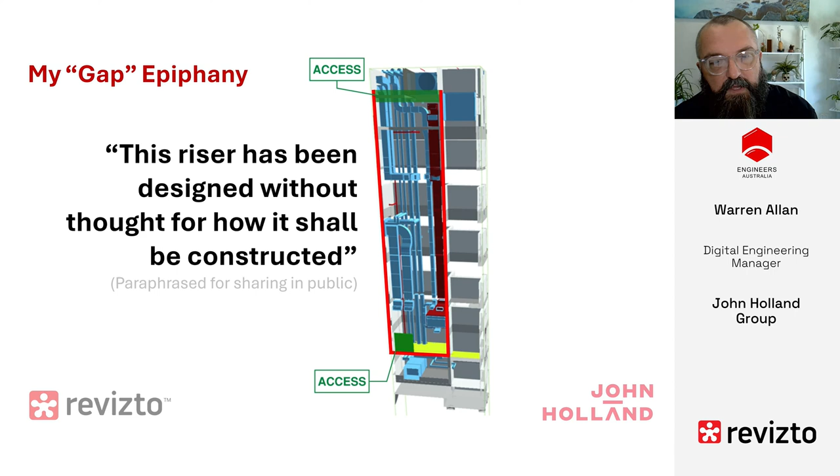So this is where I first became acutely aware of the gap between design and delivery teams. I'll paraphrase because we're not going to use our nasty words today. This riser has been designed without thought for how it shall be constructed. Basically what we had is a 30-metre vertical riser that could only be accessed from either ground floor or the open top of the riser above.

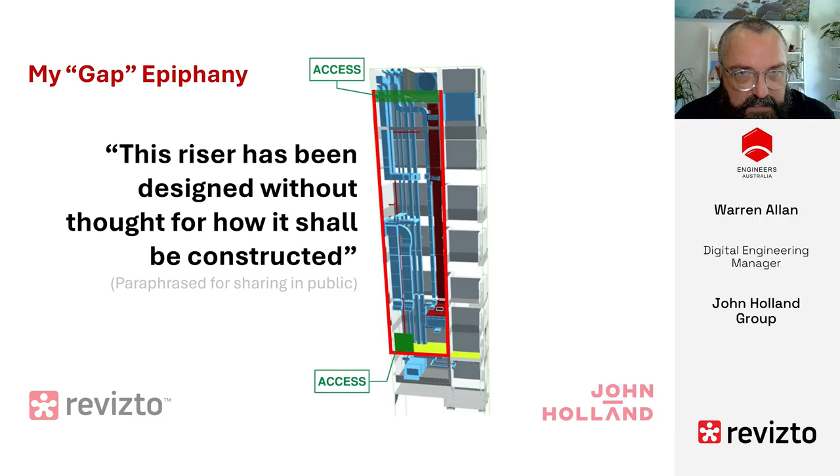So we're in this situation where we cannot get in there to install services, we cannot get in there to commission, to prepare this. It took me quite a while to convince people that this was actually going to be a delivery problem and a safety problem. What ended up happening was a prefabricated riser frame solution was implemented, which added time to program and added expense. But at the time of design, when we looked at it, no one had thought, how are we going to build this? Or they just assumed it was going to be a scissor lift or scaffolding or something along those lines. It just was not going to work.

So what I've learned over the last 20 odd years, and especially over the last 5 years moving into the digital space, is it's critical to ask the teams what they need and then listen to the response, actually listen, rather than just telling teams what they are getting. If you don't empower people to have what they need and have tools that they can actually have buy-in and use, then people won't use the platforms.

We need to start by building simple and robust workflows. We need workflows that don't rely on people just pushing buttons every day to make the systems work. We need to help teams build their individual user confidence. So if people aren't confident in what they're looking at, if they're not confident in the data they're extracting from these platforms, then they're not going to use them.

And support and empower your teams. Encourage your team to come and ask you questions, encourage them to say what is not working for them, what is causing them the most grief, and then see if there's a digital solution we can apply to it, or at least assist in the process. Be there and listen, try to understand what is actually being asked for, what the actual need is, not just forcing your team to use some software platform's newest features that don't add any real value to the workflow.

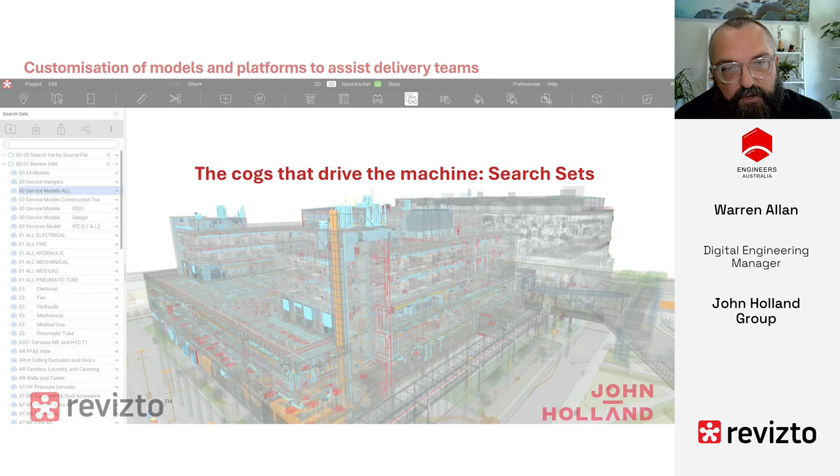So using this example where we look at floors, we have a couple of things I do recommend when people are setting up search sets: mirror your common data environment for your folder structure. That way, whether someone's working in the model in the CDE or someone's working within Revizto, you're able to have parity between the two and see where that information sits. You're not searching for things, you know the consistency in the naming structure.

And the other part is future-proofing your search sets. So if we have a search set that relies on source file alone as the first criteria that it searches for, if someone splits their model, that search set will only hold a part of the information. So I definitely recommend when you're setting up your search sets, set them up with the organization's key identifier as the contains feature rather than the source file equals the full file name. What that will do is allow you to have the multiple models from one organization and still be capturing all of the data that's available.

Now, if you're looking with two companies that both do structural and civil, for example, you might want to use the company identifier and then the discipline identifier as well, and then just leave off the numbering convention for the models. So dial that in as you need to if there's multiple parties, if there's one party modeling multiple items.

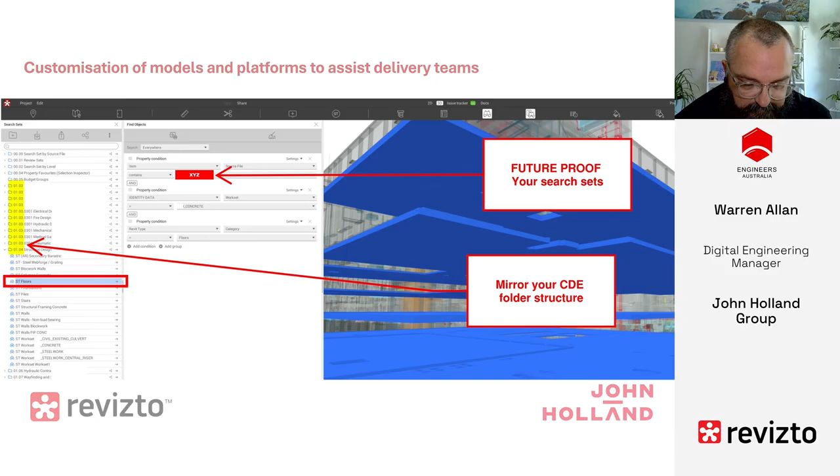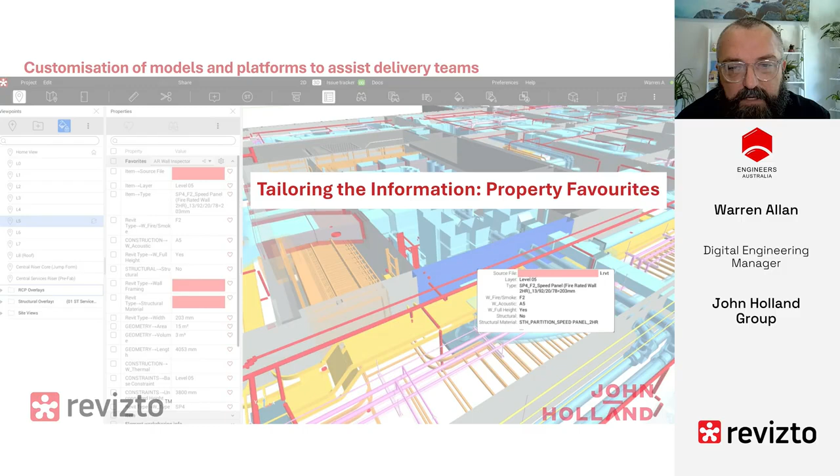So here's a couple of examples of the property favourites. The first one, we have multiple presets that are available. The first one is from the services preset. We can see there, mechanical contractor, it's a duct accessory, it's a fire damper. We know the size of it, all there, just by hovering over the item, not even selecting it.

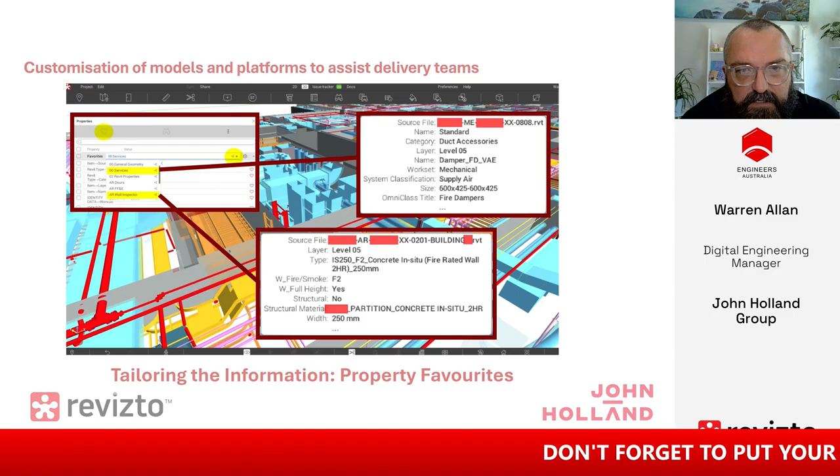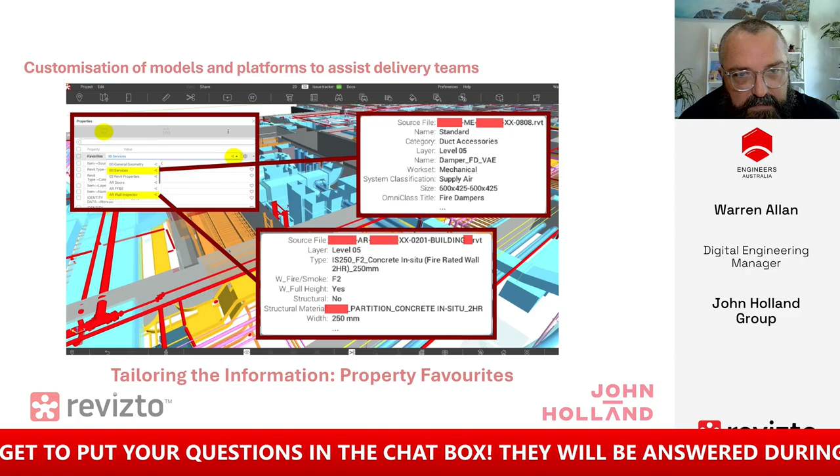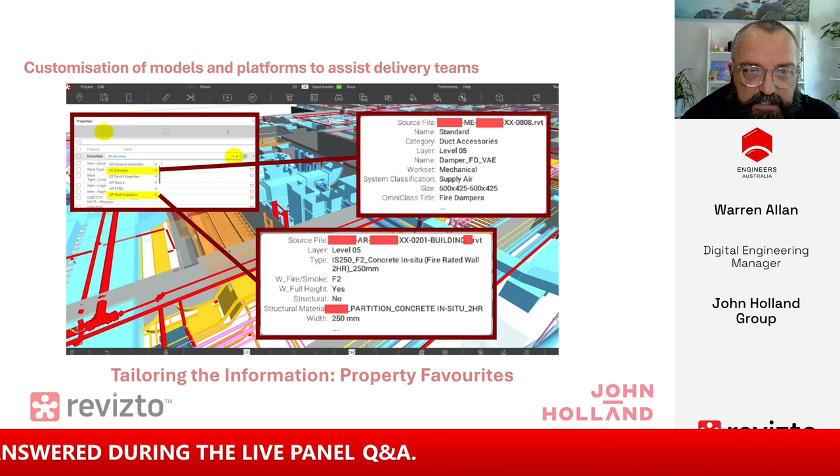When we have that preset selected, we hover over the item within the screen in 3D, and it'll come up with that information in a little selection box there, a little preview. Same thing again if we look at another preset which we have set up, the wall inspector. That comes up with what's relevant to the walls - whether it's a smoke wall, whether it's full height, whether it's structural, all that information is right there at your fingertips. All you have to do is hover your mouse over an item.

I think it's the most underrated and underutilized tool in Revizto. It's a phenomenal tool. No matter what workflow you're looking at, there will be an appearance template that you can customize and apply to make what you're doing easier, to make what you're trying to look for clearer. There's no two ways about it - there isn't a single workflow that would not be improved by having a custom appearance template set up for your organization.

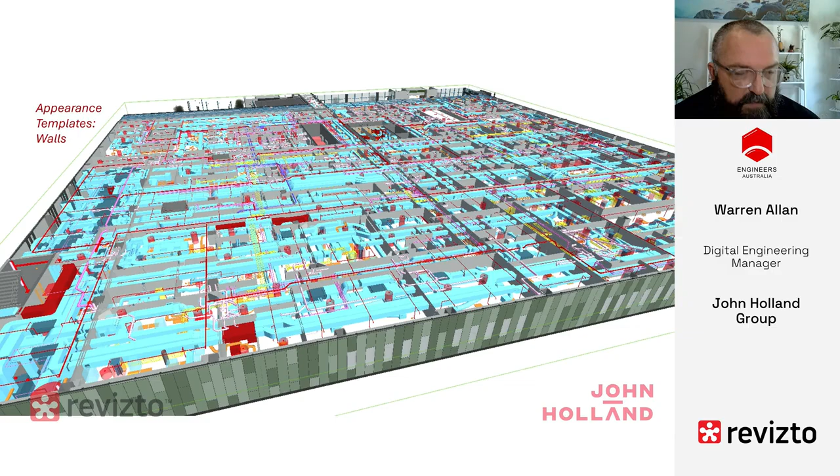So when we apply the appearance template, we now see walls of different colours. Walls that aren't full height walls become transparent. So from a site coordination point of view, you know which walls are full height, which walls aren't, which walls are pressure walls, which walls are smoke walls, which walls are fire walls, and then we've got acoustic walls in the mix as well.

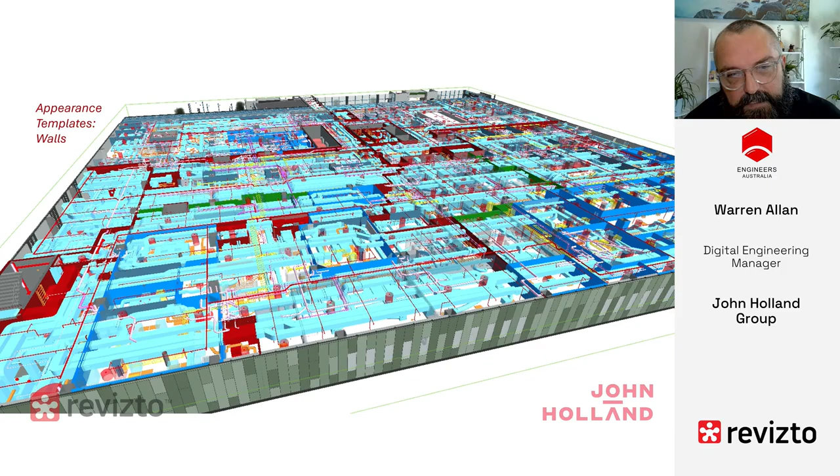Now, I will say this appearance template irks me a little bit because of the bright blue. I hate setting things bright blue in appearance templates because then sometimes you get a little bit of confusion between what's actually a selected item and what's something that's had an appearance template applied to it. So I tend to not use bright blue for anything, but the team asked, that's specifically what they wanted, so that's what they got. I'm here to help them.

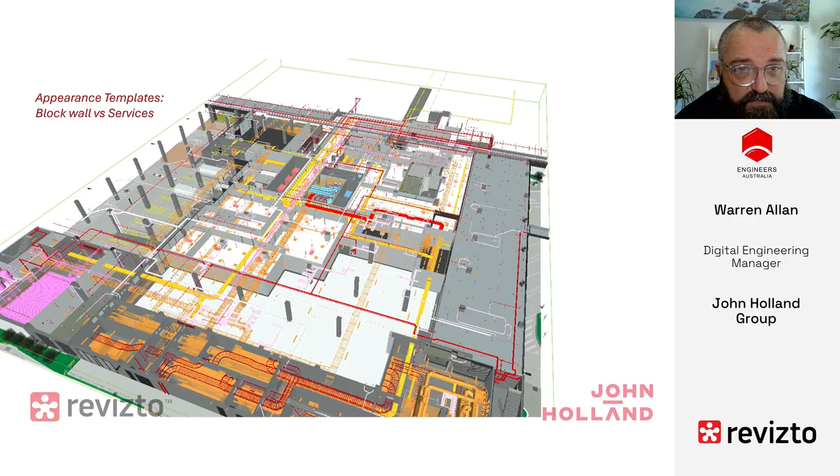Another example for the delivery team is we were looking at block walls versus services. A lot of the time we have services that are modeled through block walls, particularly firewalls. And just because the services are modeled through those walls and they're not clashing does not necessarily mean that block wall, that firewall, can be constructed on site in a way that's compliant.

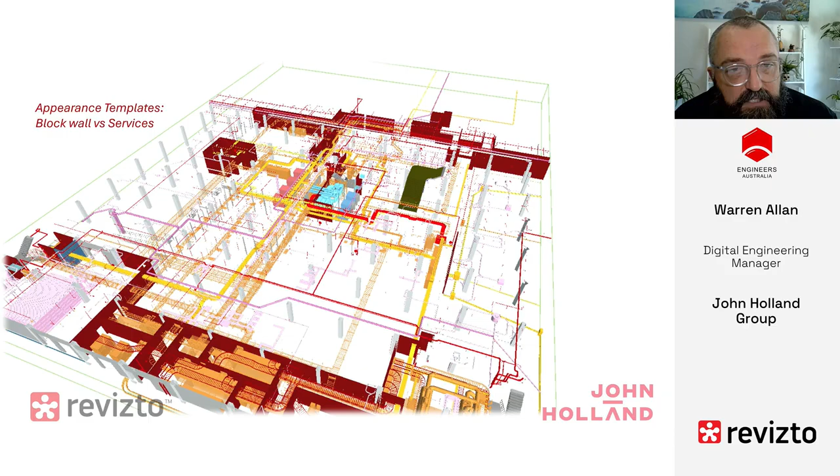So what we do is we apply an appearance template. Now what we have is the services on site just with the block walls visible. We've got red walls, which are block walls. We've got the cable trays, ductwork, fire dampers, all the services are visible. Then we can zoom in and interrogate the walls, each of the walls, to make sure that the services are configured in such a way that the walls can actually be built, sealed, be compliant.

Another appearance template - I had a recent member of a delivery team come to me and say, I just want to see, when I look at Revizto, I just want to see the rooms and anything that's bolted to the walls in the rooms. Anything that comes in later on, loose joinery or anything like that, I really don't need to see it at this point. So we created an appearance template to make sure that could happen.

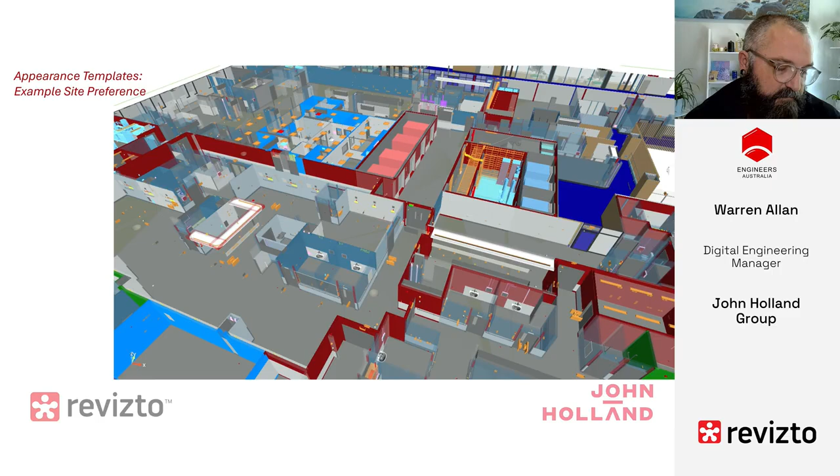If it's not modelled, you can't coordinate against it. If it gets installed, it really needs to get modelled. So some intelligent thought is required for what this includes—it's a pretty blanket statement. Just saying every single thing that gets installed on site needs to get modelled isn't going to add value. We're not going to model ceiling hangers, for example. But if you've got something that exists in a space that other services or disciplines will need to coordinate around, then that needs to be added to the mix.

Here's a good example. We recently completed stage 1 of a hospital where there were architectural bulkheads at the staff stations. At the time, the architect modelled the bulkheads, no problem, and we coordinated everything above the ceiling. But when it came time to actually install the services and the bulkheads, depending on who got there first, there was nothing but trouble—the services were running where the bulkheads needed to be framed, or the frames were where the services needed to be run.

So we learned from that mistake on the next building, and we got a simple exclusion zone added to the Revit family by the architect—different architect, different project, but we added it to the Revit family. So anywhere there was a bulkhead, there's now an exclusion zone that lives in the ceiling above it. The purpose wasn't to stop services being anywhere in there at all, but to make sure that services running longitudinally along those bulkheads actually ran outside the bulkhead framing. Perpendicular intersections were no problem.

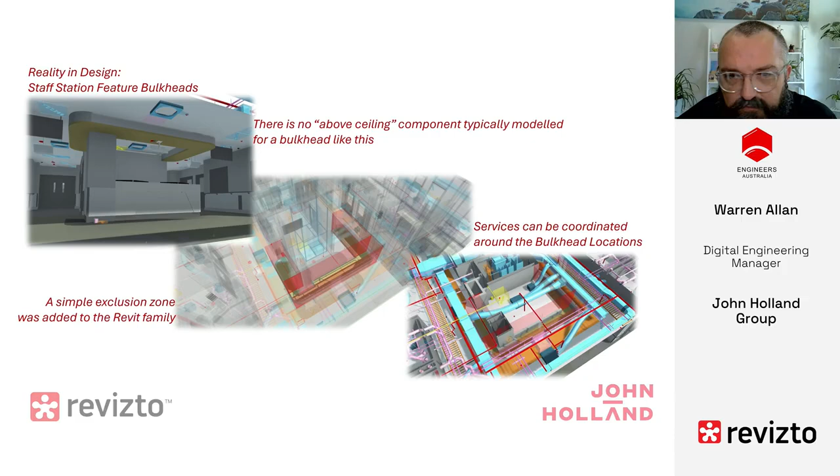They could be bridged around, but we wanted to make sure that when it came time for install, things were streamlined. There wasn't going to be trying to work out at every single staff station how the framing was going to get around the installed services, or how the services were going to get around the installed framing. It was about taking away one source of frustration, and doing that progressively.

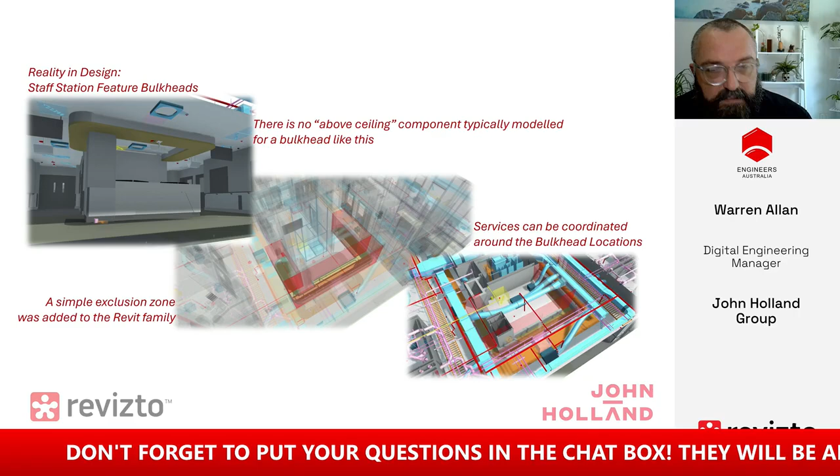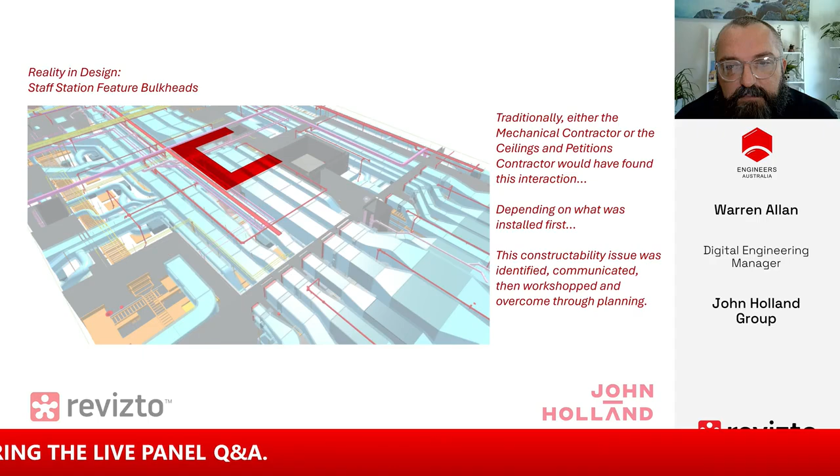Now, in the process of doing this and running clash detection, looking at it in detail in coordination, we were able to identify an example like this, where traditionally either the mech contractor or the ceilings and partitions contractor would have found this interaction depending on what was installed first, and the other one would have come along and said, how am I meant to do this? So we found this constructability issue, communicated it, and workshopped the plan for how we're going to overcome it. It looks like secondary steel is going to be the requirement there, because where it comes out of the plant room, there's just no room to run services anywhere else.

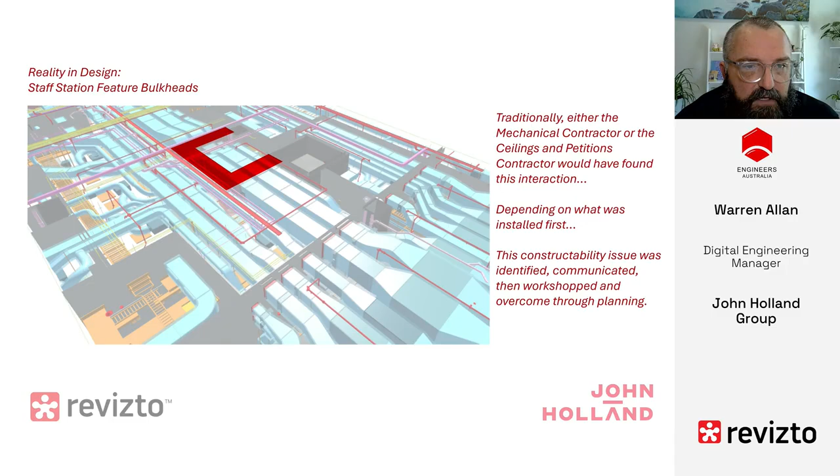The staff station is where it is—that's not moving—so we had to find another solution. We're going to create a secondary framework to support the ceiling around the services that were there. But we know that's coming now; it's being detailed prior to getting to site, rather than trying to work it out on site.

Likewise, architects are very good at modelling things that are visible. Anything you walk through a building and see, we tend to get that modelled. Where we sometimes have difficulty is items that have components that pass beyond the ceiling—things like doors, medical pendants, operable walls, bariatric supports, all sorts of things that have an above-ceiling component. We need to be able to coordinate our services around those above-ceiling components. Just because a door is shown below the ceiling doesn't mean the framework doesn't extend above it.

So we've really been focusing on reality in design on this project, making sure that if there is something that needs to be coordinated against inside a ceiling space, then it is modelled so we are able to do so.

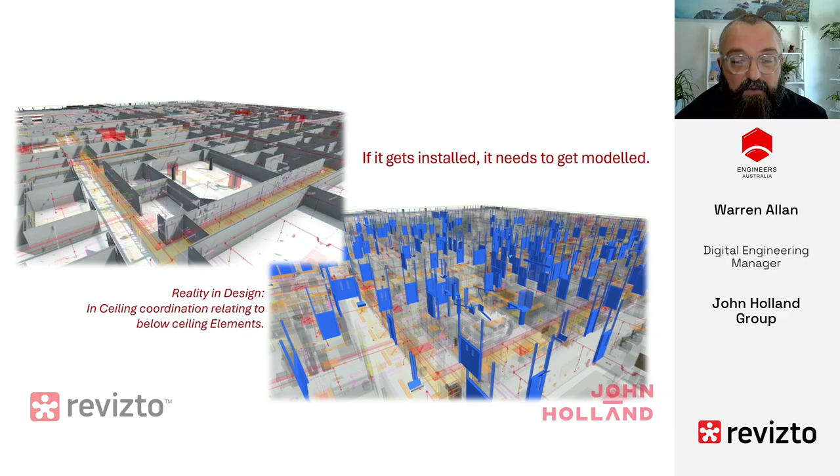So this comes from when I first joined John Holland back in January 2022. I walked out onto site, met the site manager, and he took me aside and said, I'm sick of working off drawings that are out of date. The whole team needs access to the most up-to-date information every step of the way. None of my team are printing drawings on this project. I want a BIM computer.

And I said, Scott, most computers are BIM computers. And he rolled his eyes and looked at me and said, no, I want a virtual plan bench. So that's what we set about doing. We set up a virtual plan bench.

So this bit of kit was used all day, every day in that site office. It is basically allowing the team to look into the crystal ball. So here we see Scott and his team looking at the virtual plan bench, which is the crystal ball for the project, looking at intricate areas, mapping out works, planning works, even looking at things like where scaffold needles were going to be coming into existing plant rooms.

None of the team had used Revizto previously, so we started training from scratch, using it on the PC, using it on the virtual plan bench, and also Scott bought iPads for all the team. So everyone now had access to all of the model information out there at the coalface, out there on the projects.

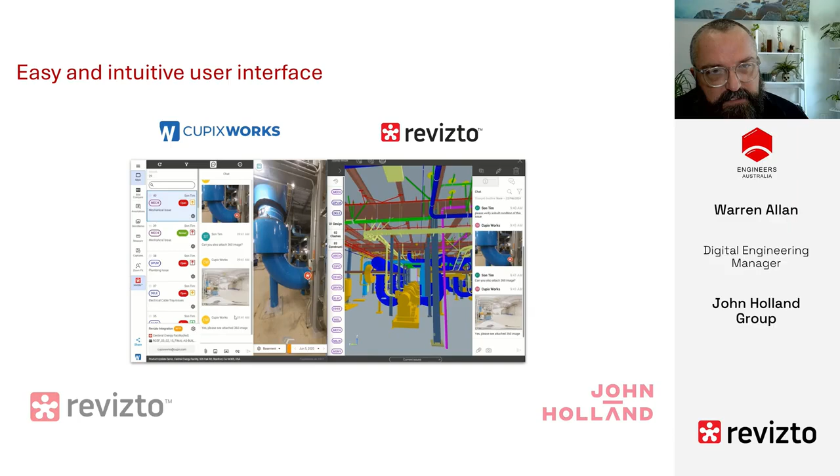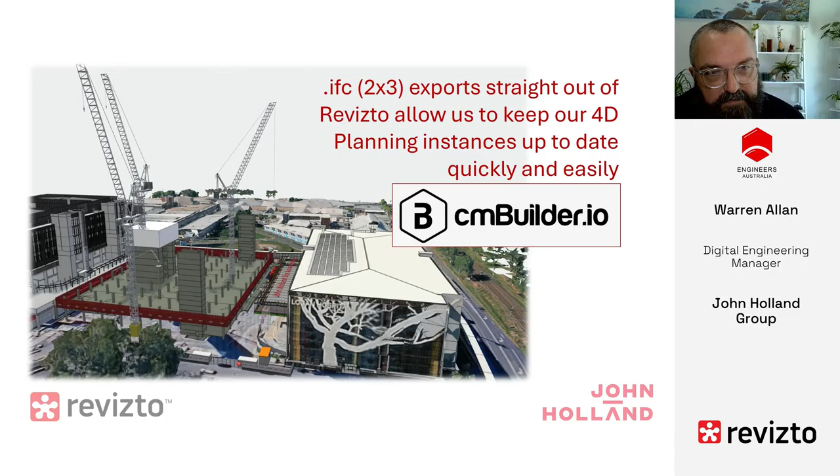And finally, very briefly, 4D planning. IFC 2x3 exports straight out of Revizto allow us to keep our 4D planning instances up to date quickly and easily. We're not relying on teams to produce IFCs for us or DWFX files. We can just grab an IFC straight out of Revizto, drop it into CM Builder, and the teams are in there doing their own 4D planning and delivery. It's a phenomenal tool.

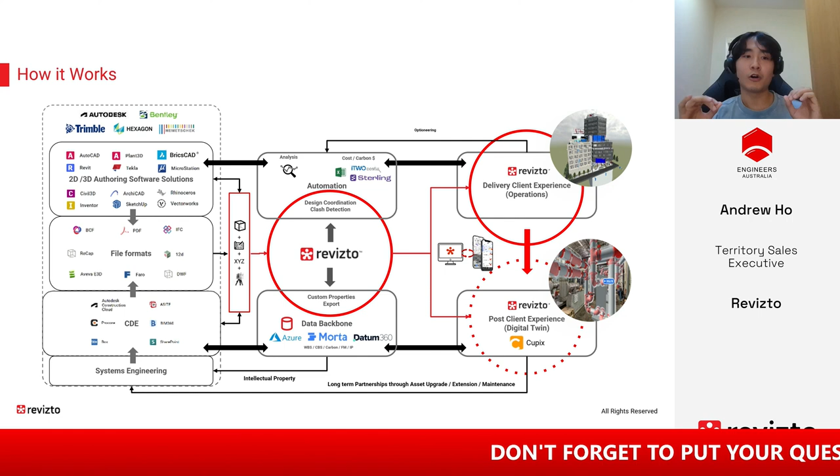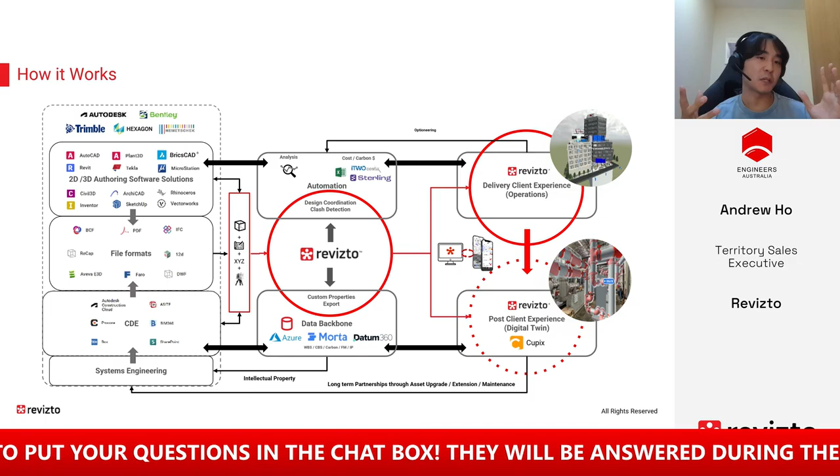This is just a sample slide of one of our customers that shared with us they've used many different kinds of tools from the industry in different projects that they have. Some may look very familiar to you. On the left, you'll see the various different authoring tools from the top. Down below, the different file formats they have to navigate, and all the way to the bottom, the CDEs they have to work with. It may seem ordinary, right? Maybe. For a project, it may not be that tricky. They use what they're given.

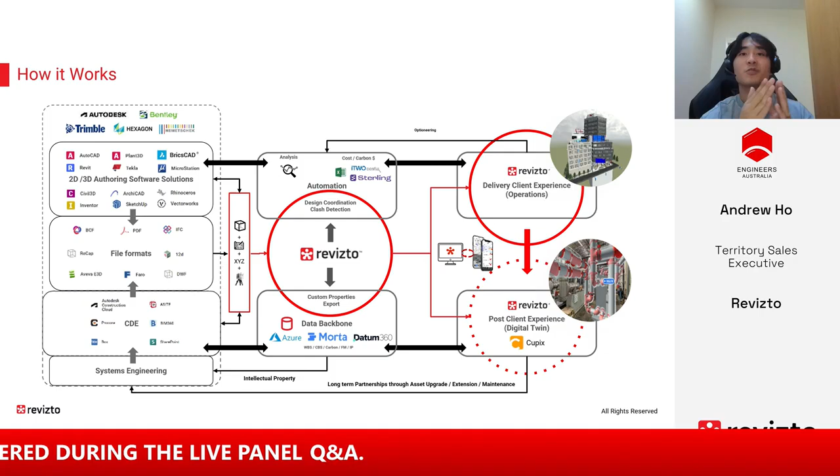But if you're talking about an enterprise approach, a corporate level, you've got siloed data and you want to submit a report to your management in terms of master planning, for bidding of new projects. And all this information is in different layers. You can't really export them out to put them into your Power BI. That's where Revizto, our tool, like a collaboration engine, would come into play and bridge all those gaps together for you. It is the backbone for you to do your master planning and all the way to delivering that level of client experience at the end of the day.

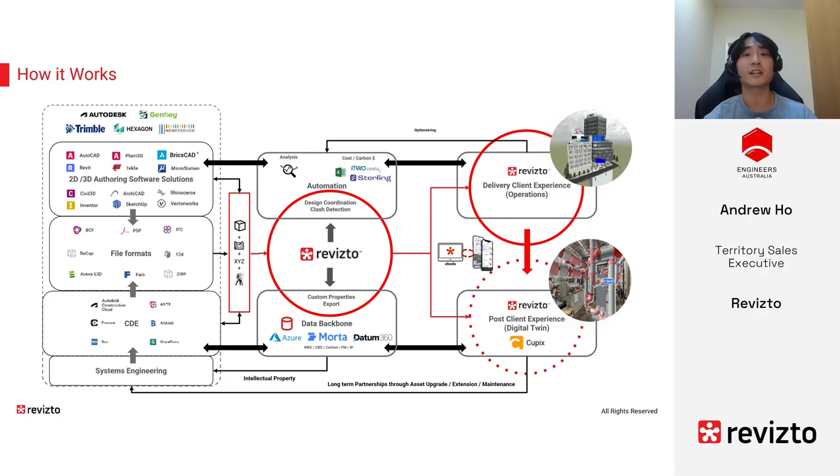As I mentioned previously, these are the plugins that we have and the supported formats, all of which have been vetted through, and after speaking with and understanding from all of our customers and partners in industry, these are the connections and integrations that we have worked to deliver to the general masses to help you with your workflow.

And truly about mobile communication, whether you're on site to view the model or even resolve defects on site, or even on your tablets, and all the way to the office using your computer. The gap between the site and mobile on site itself and in the office is ever so small, and information is carried across.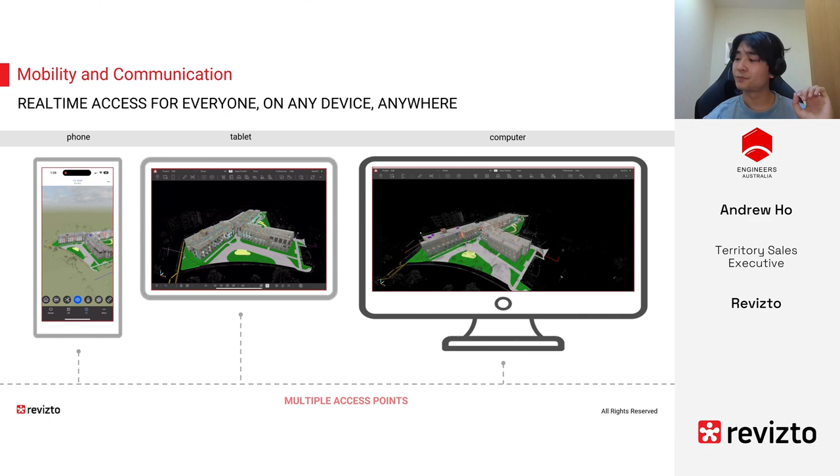So, to sum it up, I'll pass this on to the keynote speakers to emphasize a little bit more about their use cases and about what Revizto is about from a technical perspective.

Imagine this: your models are now uploaded automatically into Revizto. Your communication is all tabulated and managed in one platform. No more WhatsApps, no more PDFs, no more email exchanges. I mean, occasionally you do have some email exchanges, but not for the purposes of resolving clashes or resolving issues.

Everything can be settled and resolved on Revizto itself, reducing the level of RFIs. No longer do you have to wait for a week to resolve an RFI. Everything can be done on the spot like that. So this is really the point that I want to drive across to the audience.

Start by changing these processes. Start by encouraging true collaboration, by having communication being shared across with everyone. It's not only going to make your life easier, it's not only going to make your job much easier, it's also going to make the company have a little bit more profit in pocket. And all that in turn, it's a circular economy at the end of the day. It's going to impact you, it's going to impact your business, and it's going to impact the surroundings around you.

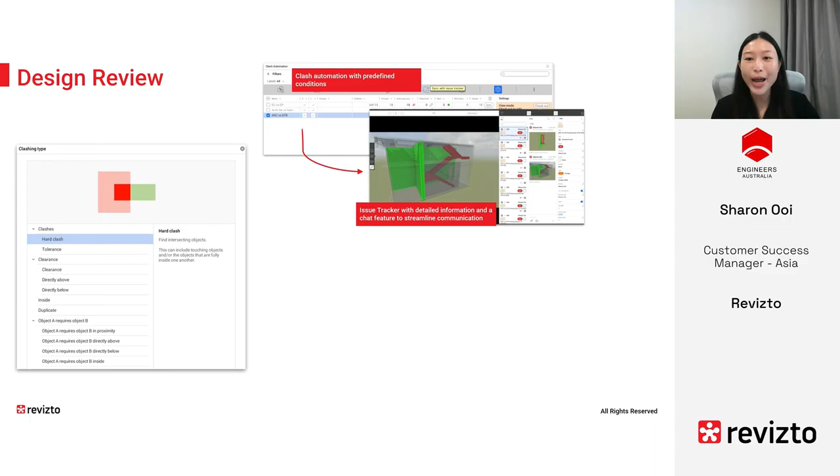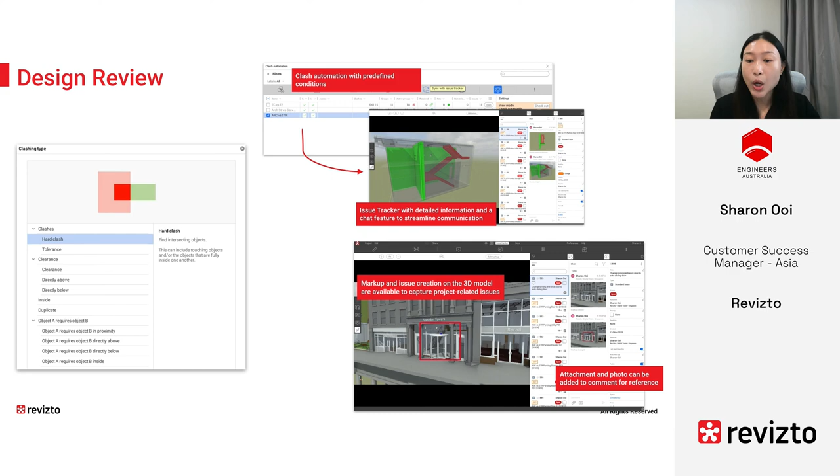During the design phase, clash detection becomes crucial. Revizto clash automation doesn't just flag clash issues, it identifies design problems like missing elements or insufficient headroom clearance. Clashes can be grouped according to your workflow and automatically pushed into issue trackers. Using predefined stamp templates, issues are automatically assigned to relevant team members, removing the need for manual tracking. Each issue carries full history, status updates, and a live comment thread, keeping communication clear, transparent, and actionable.

When it comes to design review and coordination meetings, Revizto allows you to walk through both 2D and 3D views, side by side or overlay, providing a clear visual of design intent. This makes it easier for those more comfortable in 2D to engage with the models, ultimately enhancing communication across disciplines.

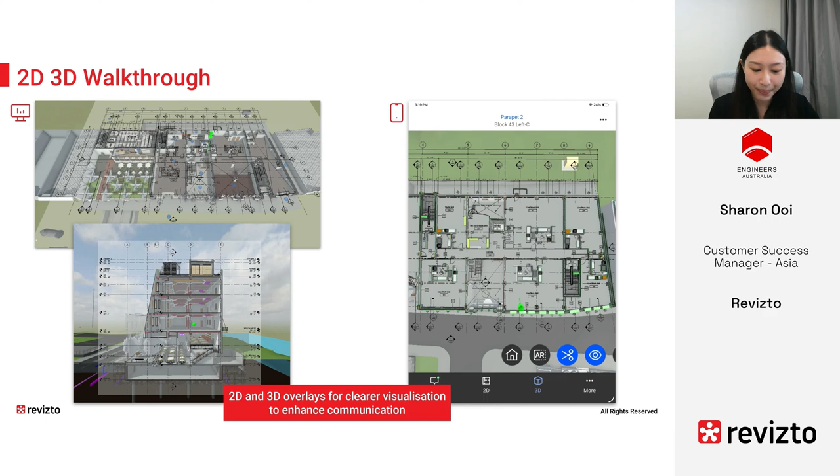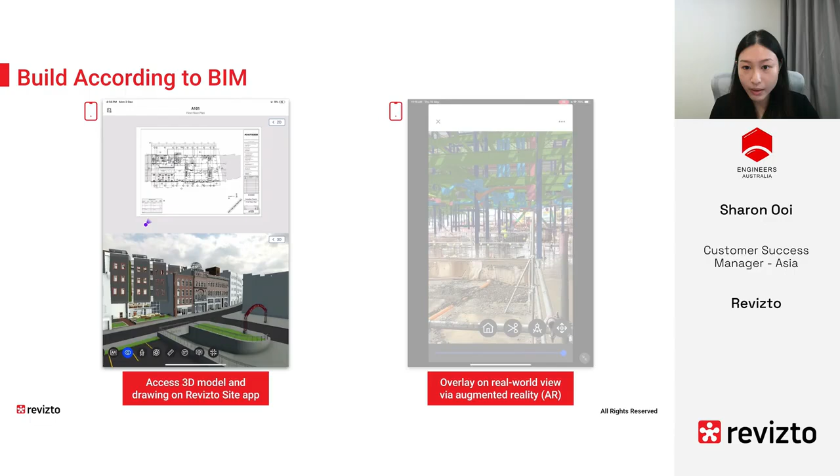Once design is finalized and construction begins, the site team can go fully paperless with Revizto Site App. The Site App gives teams access to models and drawings on the go. With the 2D and 3D split view, users can see exactly where they are on the plan while viewing the 3D models in context. Even better, Revizto's AR features overlay the 3D models onto the physical environment, enhancing spatial understanding and reducing on-site guesswork.

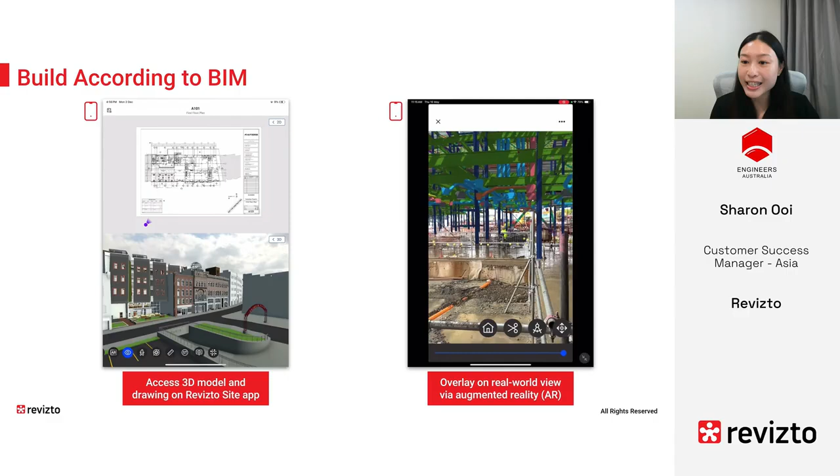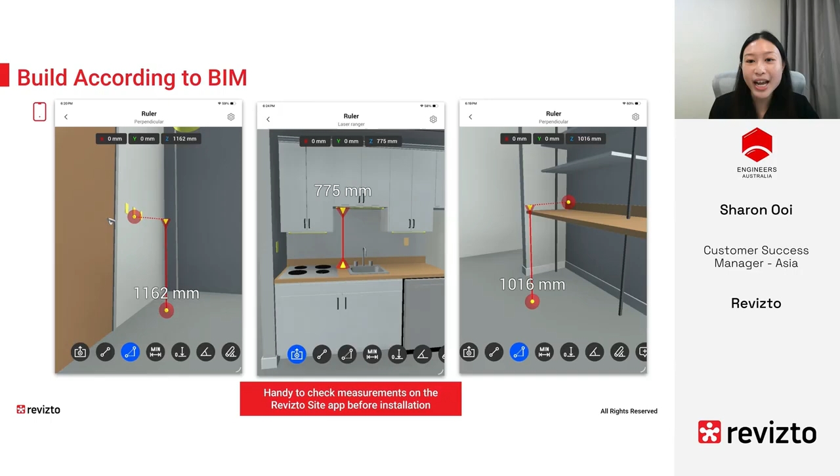Accuracy is everything during construction. The ruler tool lets teams check dimensions directly in the models on laptops or mobile devices. This ensures the site team can verify measurements before installation, reducing rework and ensuring alignment with the BIM models.

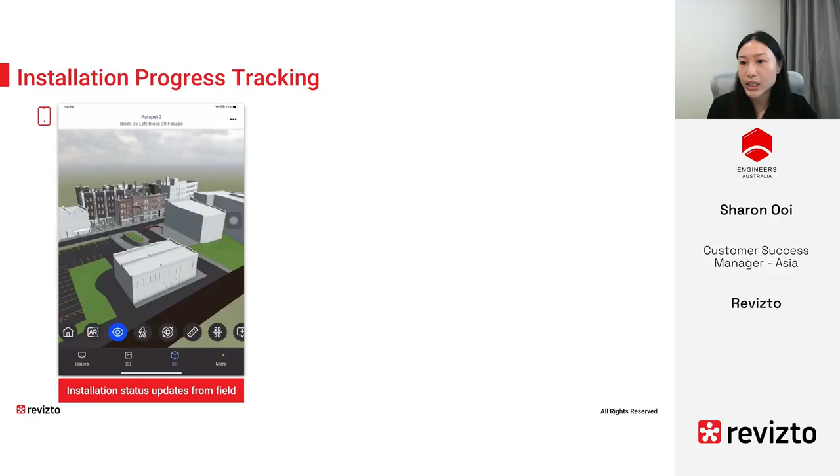Conventionally, tracking installation progress from site to office is a slow manual process. Site teams mark up floor plans, scan them, and send them back to the office for verification, a process ripe for delays. With Revizto Site App, this process becomes effortless. Site teams can jump into the models and update installation statuses directly. And thanks to 2D and 3D overlays, the visual content makes updates even clearer. Once the model is synced, the office team has immediate access to the latest progress, no back and forth required.

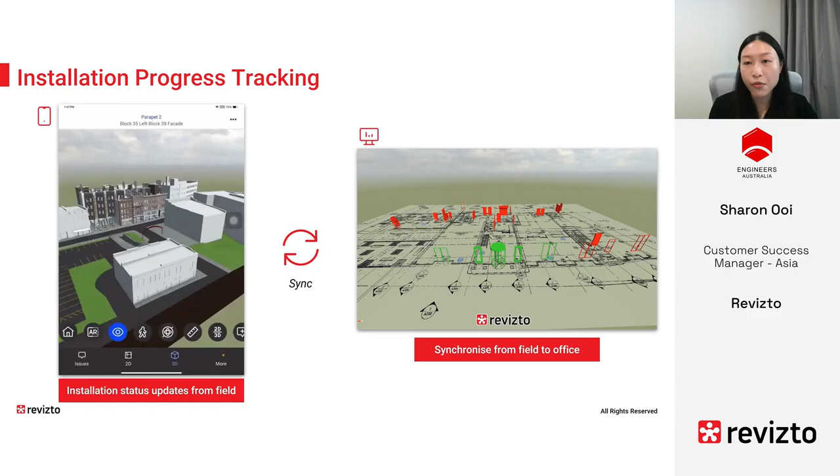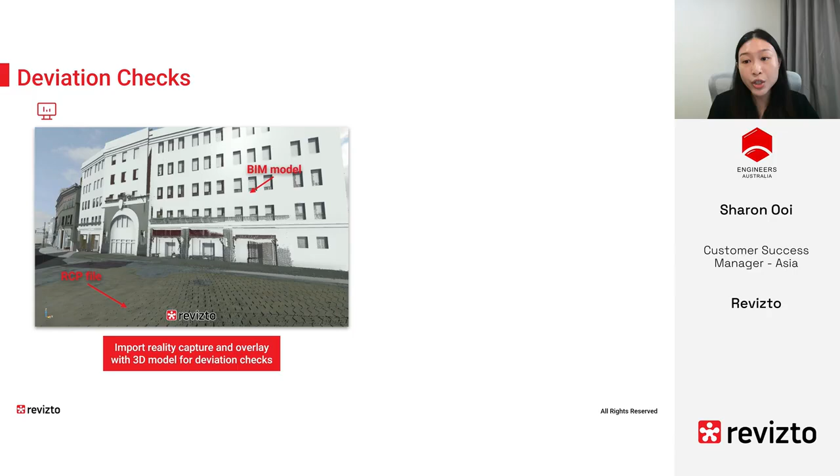Revizto also supports the integration of large point clouds. This allows teams to compare the design model against as-built conditions, an essential step for accurate project delivery and handover. With the AR tools, it can also assist with deviation checks by overlaying the models onto the real world, helping identify discrepancies more effectively.

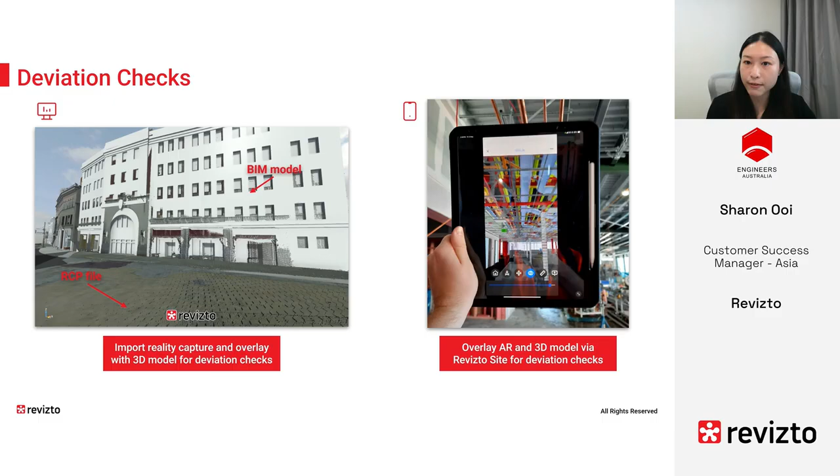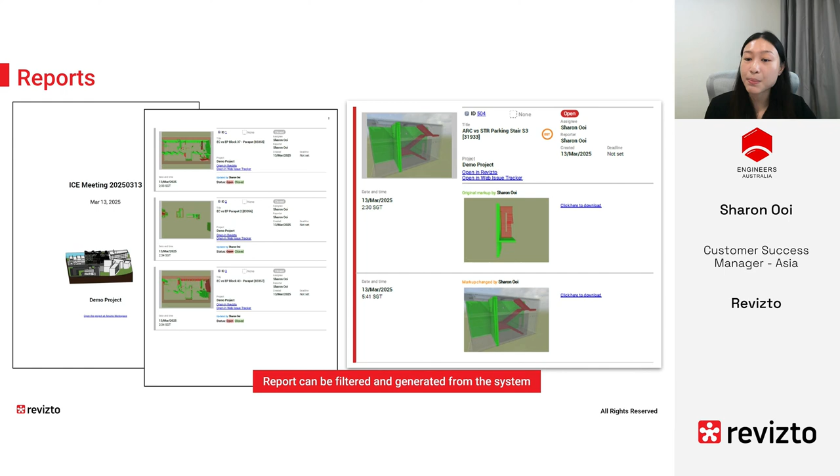Capturing project data is one thing, reporting it efficiently is another. Revizto's reporting tool lets users generate reports by filtering issues based on type, location, status, or assignee. These can be exported as PDFs or Excel, perfect for progress reviews or stakeholder updates.

To take reporting a step further, Revizto also enables project dashboards. You can visualize project health in real time by tracking issues, blockers, or team performance through charts and filters.

To summarize, here's how Revizto can transform your projects: enable seamless collaboration for all stakeholders on a single platform, streamline design coordination from the office to the site, eliminate rework or reduce project risk, keep a clear, accessible record of decision-making history, minimize double handling of tasks and improve efficiency, and achieve as-built delivery and handover, all within a unified platform. Revizto brings everything together, making your project workflow more efficient and effective.

Now that we have explored what Revizto can do, let's take a look at how it aligns with Singapore's Integrated Digital Delivery, or IDD, framework. For those who may be new to this concept, IDD is an initiative by the Building and Construction Authority, BCA, of Singapore. It aims to accelerate digital adoption across the built environment sectors by integrating processes and information throughout the entire project lifecycle, from design and fabrication to construction and operations.

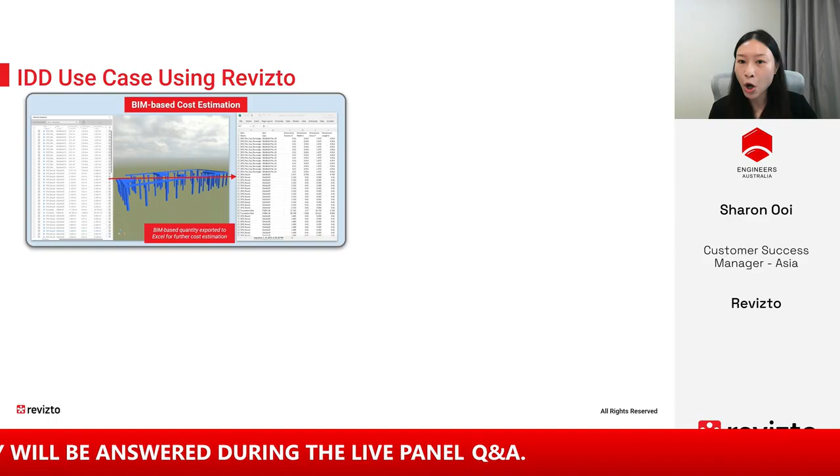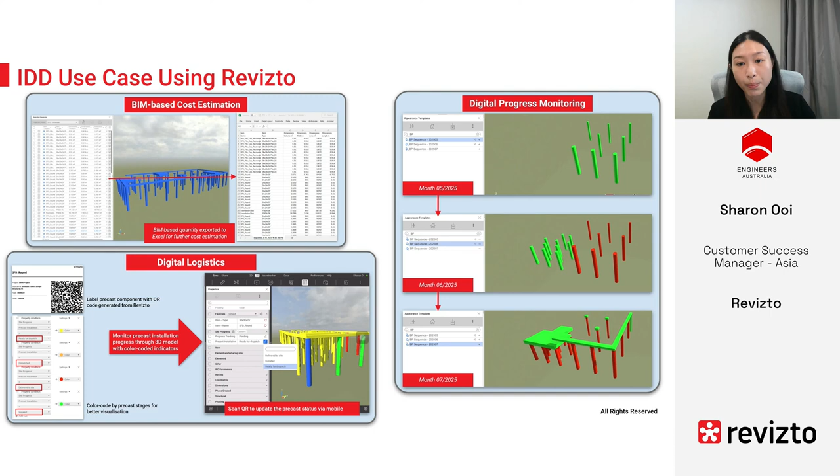Extract quantities directly from BIM models to Excel for cost estimations, saving time on manual takeoffs. Generate QR codes for precast components so that site teams can scan and update installation statuses on the spot. Use color-coded progress tracking to visually distinguish completed versus pending work month by month.

As you have seen, Revizto is not just a coordination tool, it's a platform that supports key phases of the IDD lifecycle. If you are interested in exploring how Revizto can support your projects, whether you are at the design, construction, or delivery phase, feel free to reach out after the session. We're happy to discuss how Revizto can be tailored to suit your workflow and project needs.